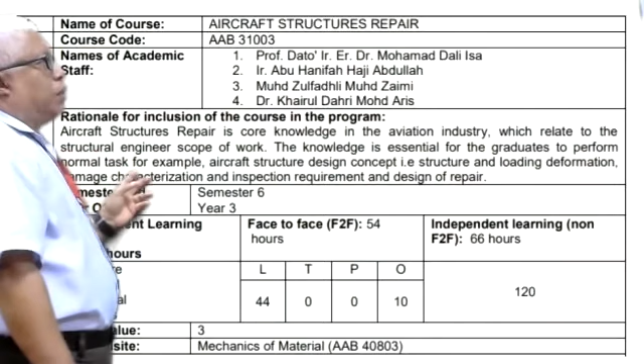This knowledge is essential for graduates to perform normal tasks, for example, aircraft structure design concept. You need to understand the structure, loads, stresses, factor of safety, and also before that, you need to understand the types of damage, characterization, and inspection of the damage. So you will be able to determine the extent of damage and be able to design a good repair of the structure.

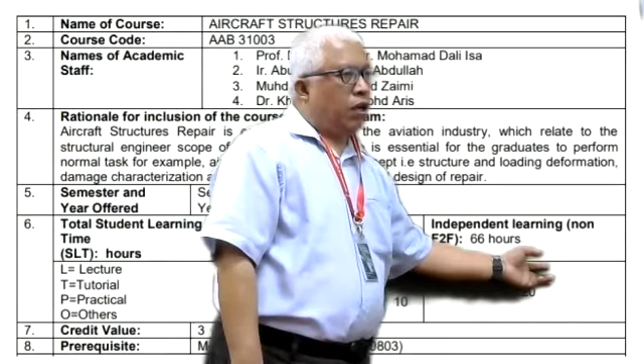This course is 120 hours total of lecture, tutorial, practical, and others. So total up to 120 hours, that is face-to-face. However, we are lacking face-to-face at the moment, so it will be online. We can consider this face-to-face become online, which is 54 hours.

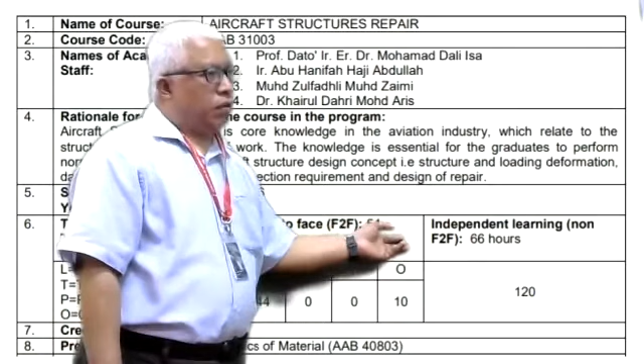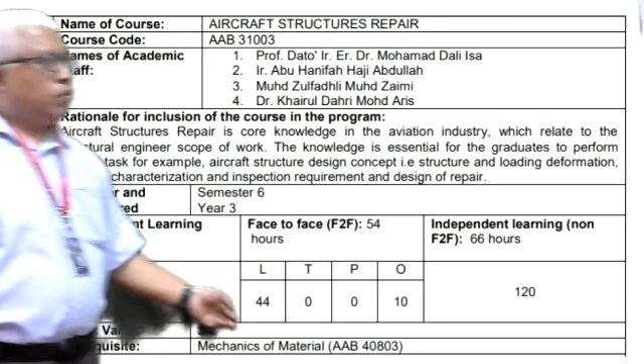So you have to come to the lecture, listen to the lecture, and the hours will be around 50 hours. So again, the prerequisite for you to be able to pass the course, if it's flying with flying colors, you should have mechanics of material. You should have good understanding of mechanics of material. If you scored fully on mechanics of material, you should still go back and review it.

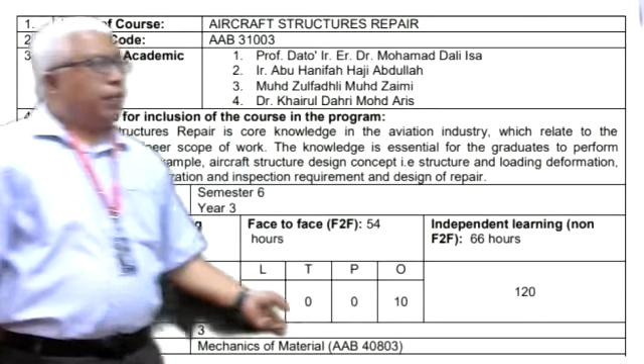But some students may also take this course in parallel. It's not advisable, but I cannot prevent you from doing that because I'm just teaching the course. If you are doing that, you have to be prepared. You have to learn your mechanics of material ahead of your friends in the class, because you're supposed to have learned it already. So that is the general review about this Aircraft Structure Repair course.